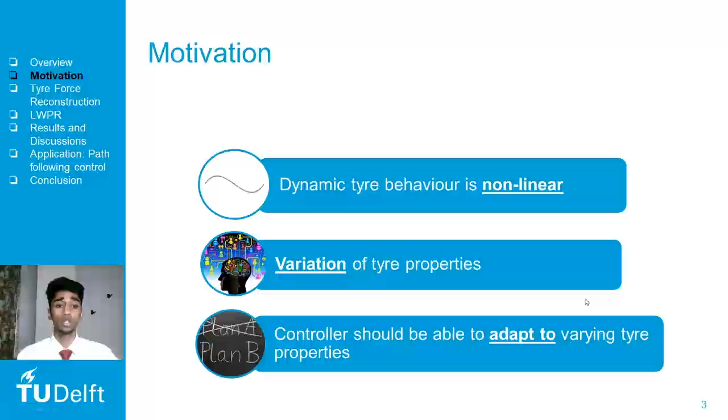It is very difficult to understand what exactly is going on inside a tire at all times. So let us go through some key motivational points. Firstly, dynamic tire behavior is extremely nonlinear in nature. Secondly, we have variation of tire properties, which may be due to variation in tire temperatures, tire pressures, or wear. Thirdly, a controller must be able to adapt to these varying tire properties online.

This leads us to my research question: to ensure safety, comfort, and performance in vehicle motion control systems, the system needs accurate tire force data, especially in real time.

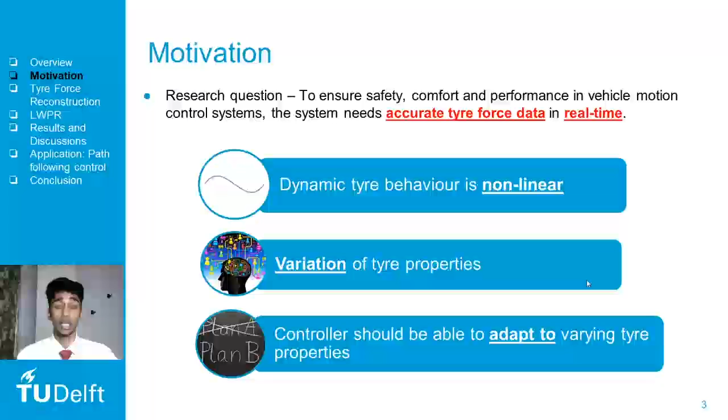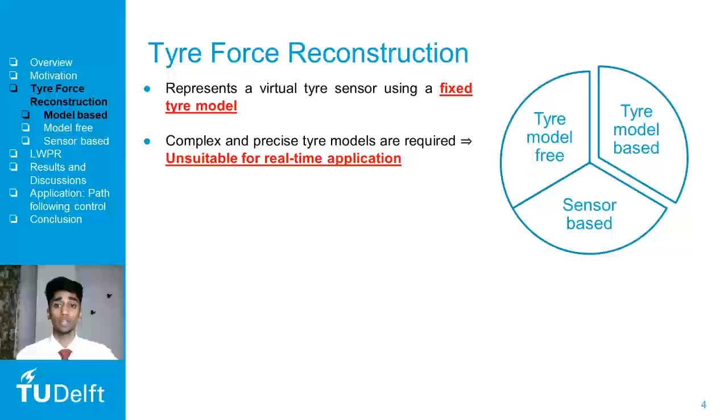Moving on to tire force reconstruction methods, there are three basic methods. Firstly, we have the tire model based method, where this represents a virtual tire sensor using a fixed tire model. In order to encapsulate the entire tire behavior, complex and precise models are required, which makes it unsuitable for real-time applications. Some commonly used models are the Dugoff tire model as well as the magic formula model.

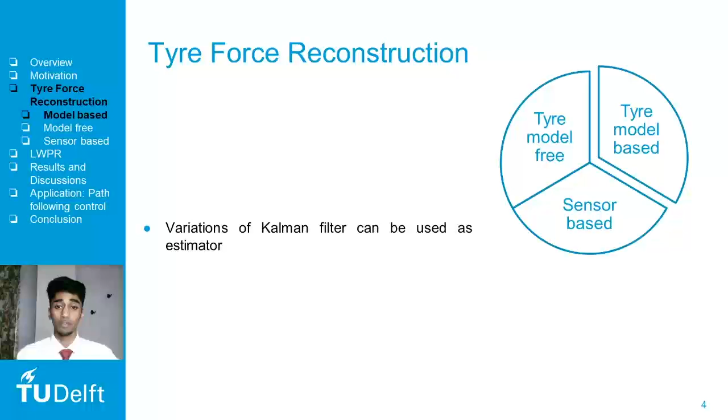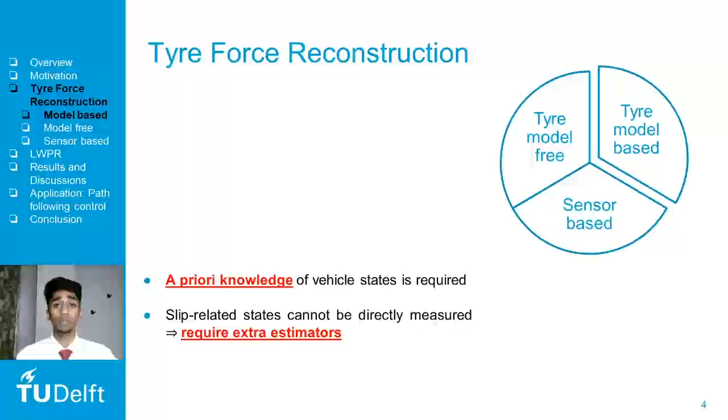Variations of Kalman filter can also be used as an estimator. A priori knowledge of the vehicle states is required for this type of tire force reconstruction. Moreover, some states like slip related states cannot be measured directly, and this requires extra estimators. These points lead to the conclusion that this method is increased in complexity.

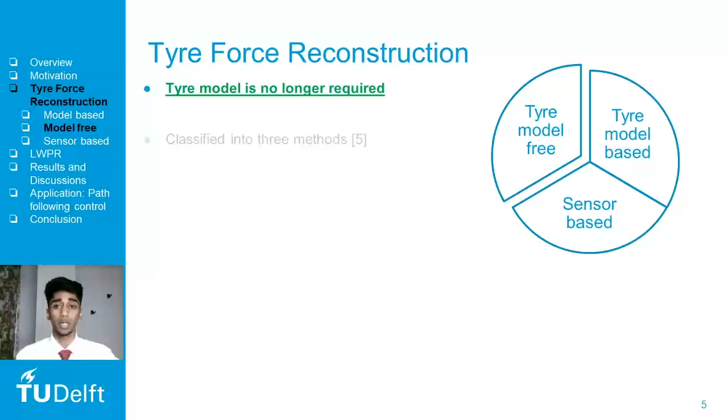Secondly, we look at tire model free methods, where the tire model is no longer required. This can be classified into three methods. Firstly, vehicle dynamics based methods, where acceleration sensors and GPS signals are used, and force balance equations are used to derive tire forces. Secondly, wheel rotation based methods, where wheel speed sensors are used and torque balance equations are used to derive tire forces.

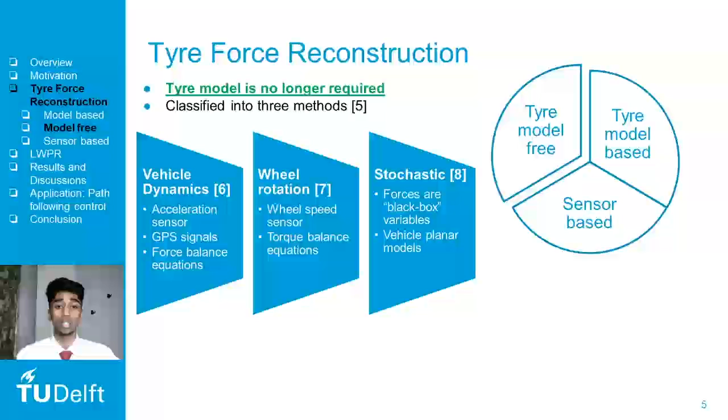Thirdly, we have stochastic methods, where forces are treated as black box variables and vehicle planar models are used to reconstruct tire forces. This type of method is suitable for uncertain road friction parameters. However, its complex tuning and computational costs are a big drawback.

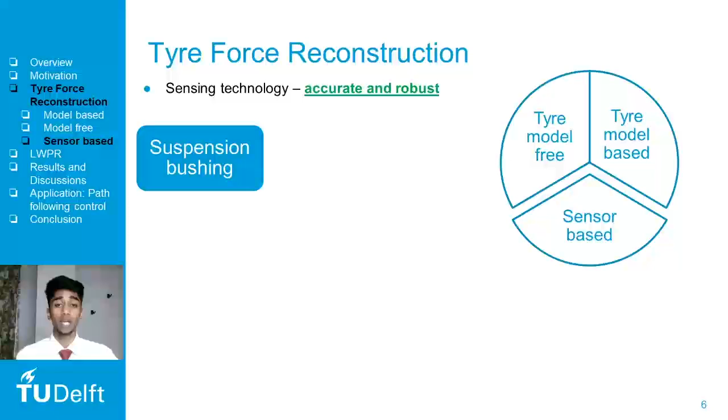Next, we have sensor-based methods. Sensing technology is known to be accurate and robust. We have different types of sensor-based methods. Firstly, suspension bushing, where eddy current displacement sensors are used. The drawback of this method is the complexity of the approach and the durability of the bushings.

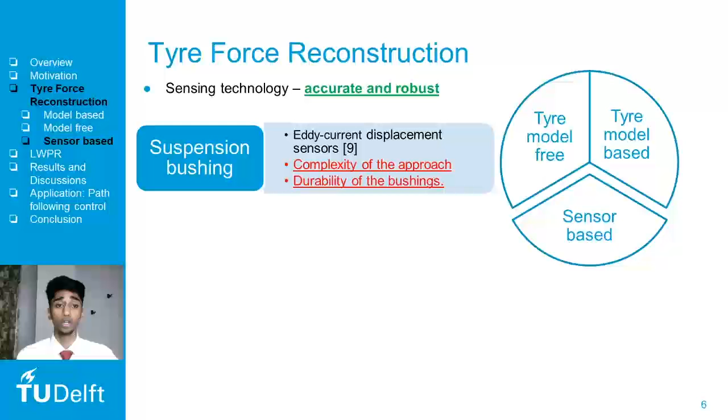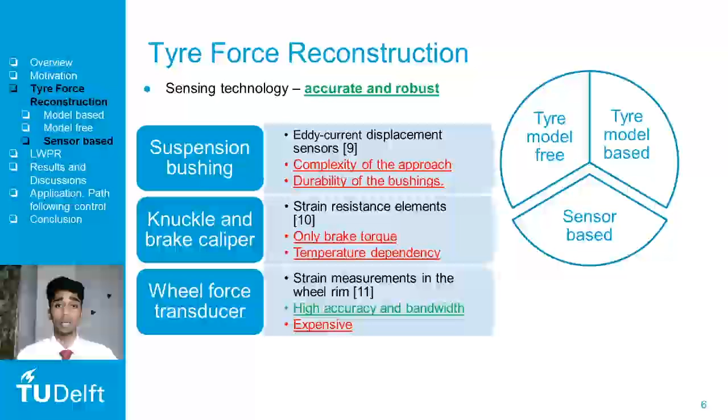Secondly, we have the knuckle and brake calipers, where strain resistance elements are used for tire force reconstruction. However, only brake torques can be measured, and the temperature dependency of this method is a drawback. Thirdly, we have wheel force transducers, where strain measurements in the wheel rim are used for tire force reconstruction. This method, even with high accuracy and bandwidth, is expensive. Other methods such as load sensing bearings have also been researched upon.

Apart from the discussed tire force reconstruction methods, we have a new one known as the hybrid method, which uses the same analytical base as a tire model free method and a sensor based method. Locally weighted projection regression, or LWPR, falls into this category.

For learning these locally linear models psi, LWPR uses locally weighted partial least squares regression. Within each of the linear models, latent variables are derived in selected directions, and the output of the local model is then formed by a linear combination of these latent variables.

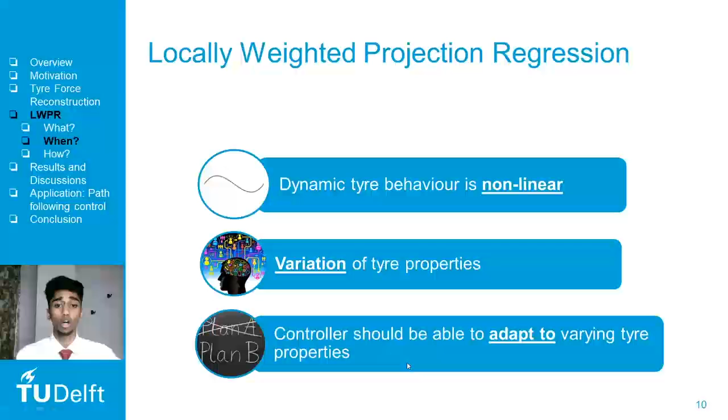Let us revisit some of the motivational points discussed earlier. We know that the dynamic tire behavior is nonlinear in nature. We know that there may be variation of the tire properties due to external factors. Also, that the controller must be able to adapt to these varying tire properties.

So when do we actually use LWPR? We use LWPR if the function to be learned is nonlinear, if incremental and online learning is required, and if the model requires adaptation since the target mapping changes over time. These points precisely address the three motivational points discussed earlier.

How do we go about using LWPR? Again, to reiterate, the general goal is to approximate nonlinear functions. I shall go over the algorithm briefly. So we start with initializing the algorithm with 0 receptive fields.

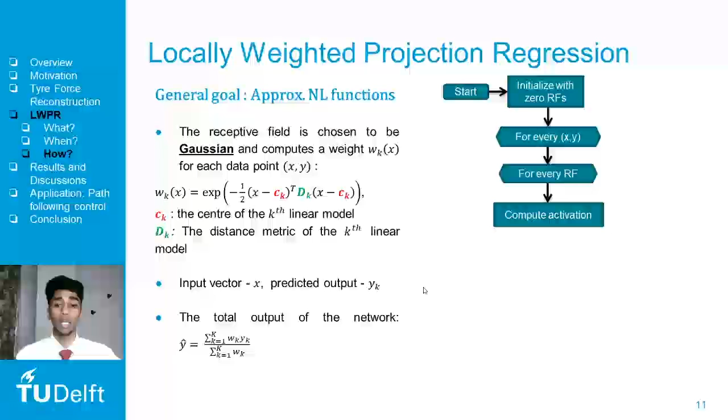I shall revisit this point later. For each input vector x, every local linear model gives a predicted output yk, and the total output of the network is a weighted mean of this predicted output.

The next step is to update the partial least squares and the distance metric. In the incremental partial least squares, we have lambda, which is a forgetting factor, used to determine how much of the past data needs to be forgotten.

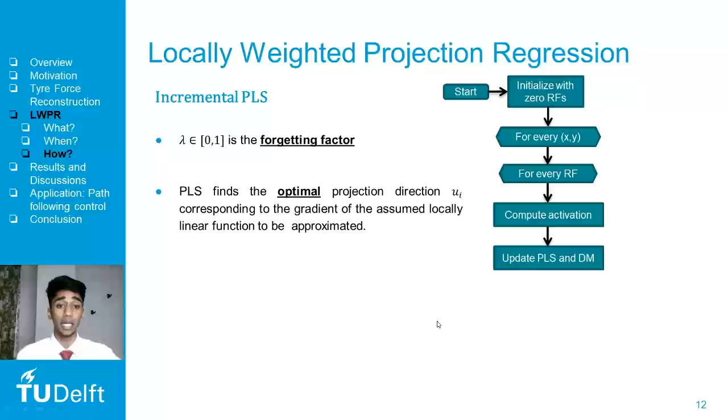Furthermore, the PLS finds the optimal projection direction corresponding to the gradient of the assumed locally linear function to be approximated. An important part of the PLS is to choose these projections according to correlation of input-output data.

The next step is the distance metric update step, where the distance metric is basically a parameter that determines the validity of the local model and hence influences the shape and size of the receptive field.

The distance metric d is optimized individually for each receptive field by using an incremental gradient descent based on stochastic leave one out cross validation criterion.

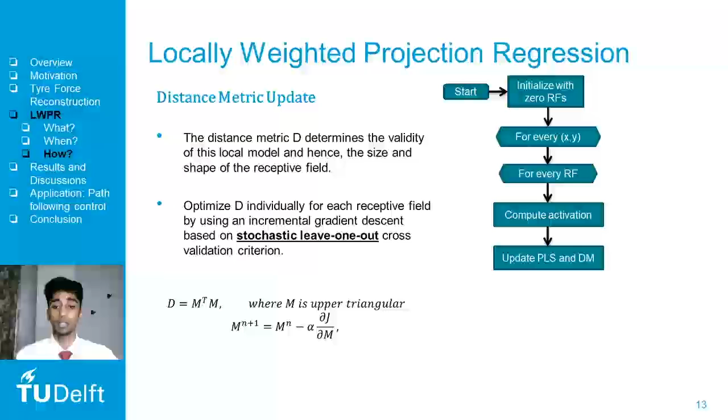This is done as shown, where M is upper triangular in nature and the recursivity in M is as shown in the slides, where J is the cost function to be minimized.

The algorithm also recursively keeps track of the mean square error as a function of number of projections in a local model to determine when to stop adding projections. This is done as shown, where R is the number of projections.

If this condition is true, then the whole algorithm is repeated for the next data point. If it is false, then a new receptive field is created and then the process is repeated. This is the end of the algorithm.

Before we move on to the results and discussions, I would like to first address some key parameters.

So we have alpha, which is an initial component-wise learning rate for gradient descent. It was noticed that larger values of alpha led to instability in convergence, however smaller values led to delayed convergence.

Secondly, we have the forgetting factor, where large values imply less of the past data being forgotten.

Thirdly, we have the initial distance metric for each receptive field. A large value of the initial distance metric means that the receptive fields are narrower and larger in number, which may lead to overfitting.

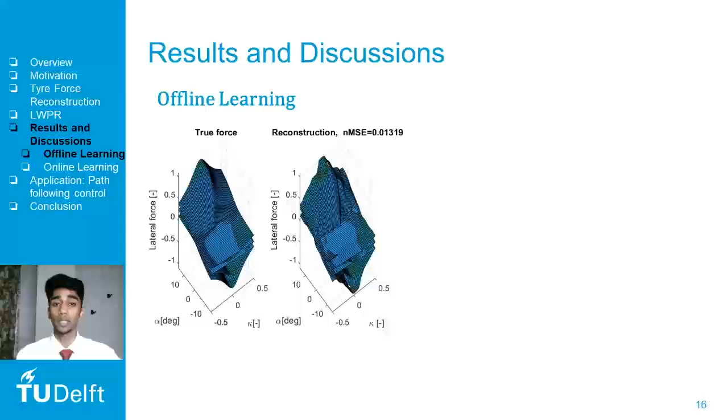So firstly, let us look at offline learning. As you can see, the inputs are the wheel slip angle alpha and longitudinal slip kappa, and the lateral force has been reconstructed using this algorithm. Similarly, the longitudinal force has also been reconstructed to a good degree with a low mean square error.

Moving to the two-dimensional case, this is the Hockenheim racetrack, and apart from the wheel slip angle, the normal force is also included as one of the inputs, and lateral force has been learned.

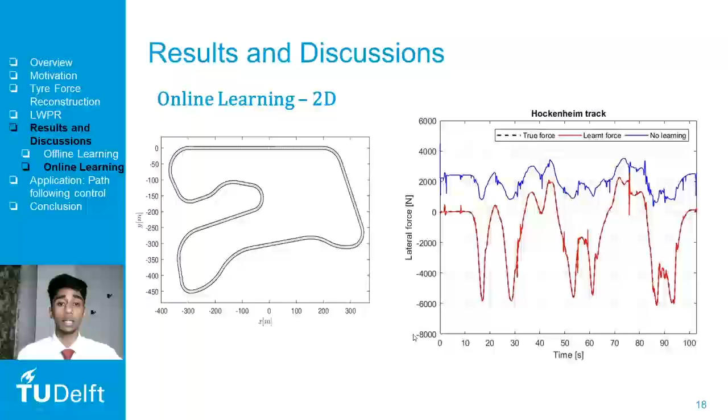Again, as you can see with the blue curve, the model has been initialized with a poor model, and the dotted line showing the true force data from the Delft Tyre model has been made available to the learning algorithm. It shows good learning performance. As you can see, the red line has completely converged.

A possible application of this algorithm is in path following control in combination with MPC, or model predictive control. The setup is as shown, with a vehicle, with a learning module and the controller.

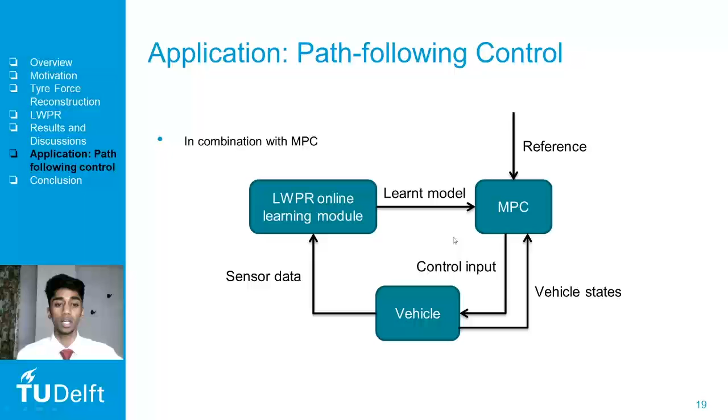The learning module receives sensor data from the vehicle, which then provides the learnt model to the prediction model within the MPC. The MPC tries to track the reference by providing an optimal control input while simultaneously obtaining vehicle state information from the vehicle.

This has been applied for an autonomous racing scenario, where the vehicle is exposed to multiple laps of the same circuit, which is an ideal place to test learning algorithms.

As you can see, the simulations were run on the Scalexio real-time machine, along with the IPG CarMaker hardware-in-the-loop setup.

The setup is as shown, where the vehicle states can be seen along with some controller data, which shows the learnt force, where the vehicle attempts to learn the tire behavior online during the race.

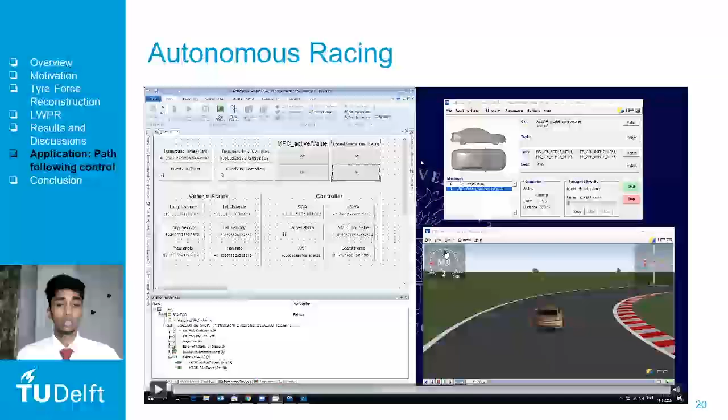It can also be noted that the turnaround time for the task is significantly low, validating it for real-time applications. Furthermore, it can be seen that the simulations are run for varying velocities and for varying lateral accelerations.

In conclusion, I would like to say that this algorithm is immune to catastrophic forgetting, which is the tendency to forget old data when encountered with data from a different distribution.

This algorithm develops a notion of experience for the controllers. Furthermore, as shown before, it is well suited for real-time applications. The forgetting factor within the algorithm helps it adapt to these varying properties online.

However, this algorithm is currently limited in its applicability, in that it can only be applied for two inputs right now, but in further applications it makes sense to extend this to multiple inputs in order to encapsulate entire tire behavior. Also, the tuning complexity of the method is a huge drawback.